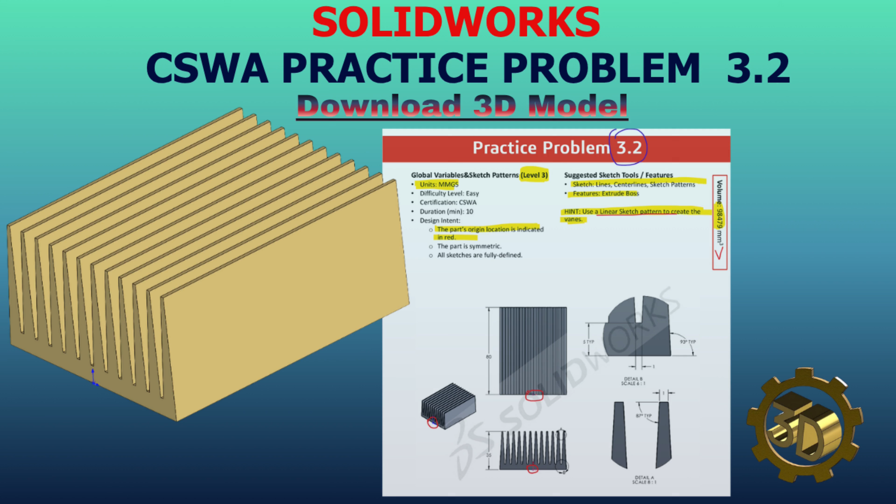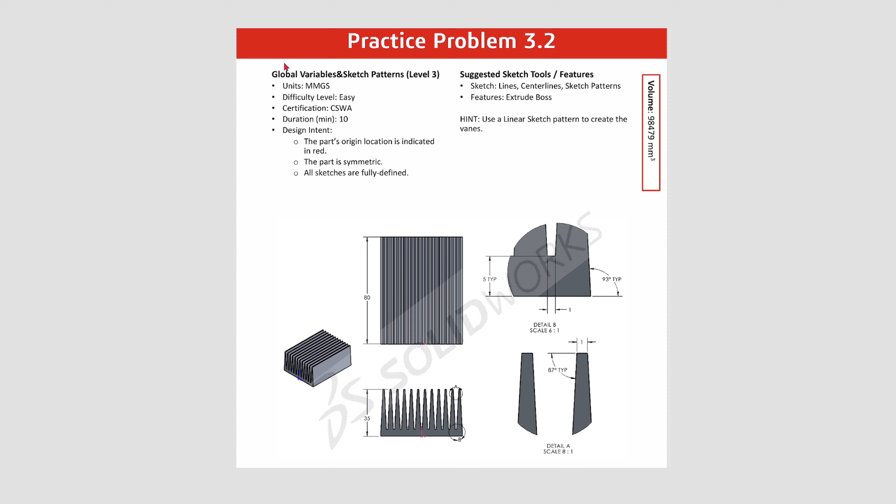Let's jump in by quickly reviewing the key details of this task. We're working in MMGS units, and this exercise focuses on global variables and sketch patterns level 3, which are very useful for controlling repetitive geometry efficiently. For this model, you'll mainly use line and centerline tools, sketch patterns, extruded boss.

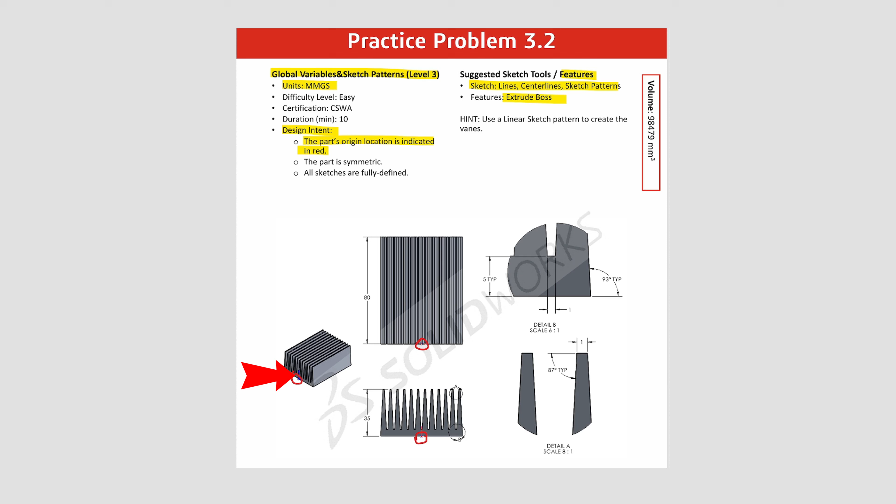The origin is located at the center of the lower front surface, so make sure your initial sketch is positioned correctly. That will save you time later. Here's an important tip. We'll be using a linear sketch pattern to create the vanes, which is much faster and cleaner than drawing each one manually.

Also, once your model is complete, the final volume should be 98,479 cubic millimeters, so you can use that to verify your result. Now let's break down the modeling strategy. The part is symmetric about a vertical centerline, so we only need to sketch one half, specifically the right side, and then mirror it to the left. This approach keeps your model simple and fully defined.

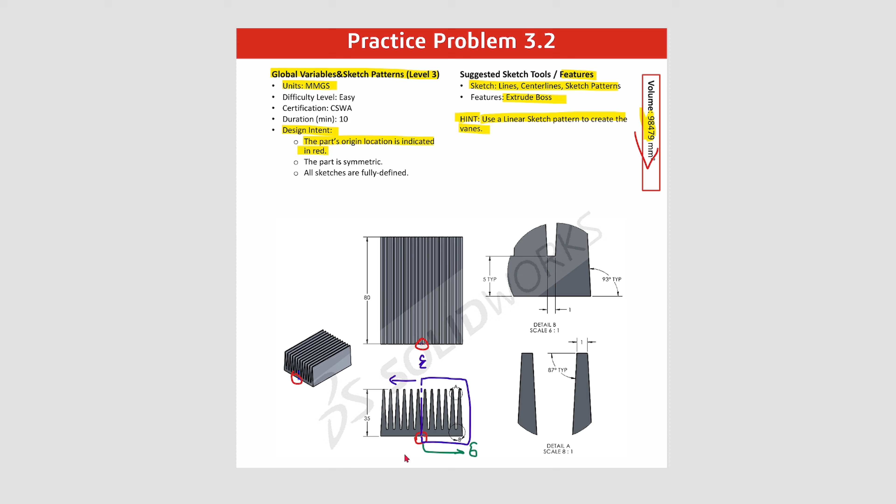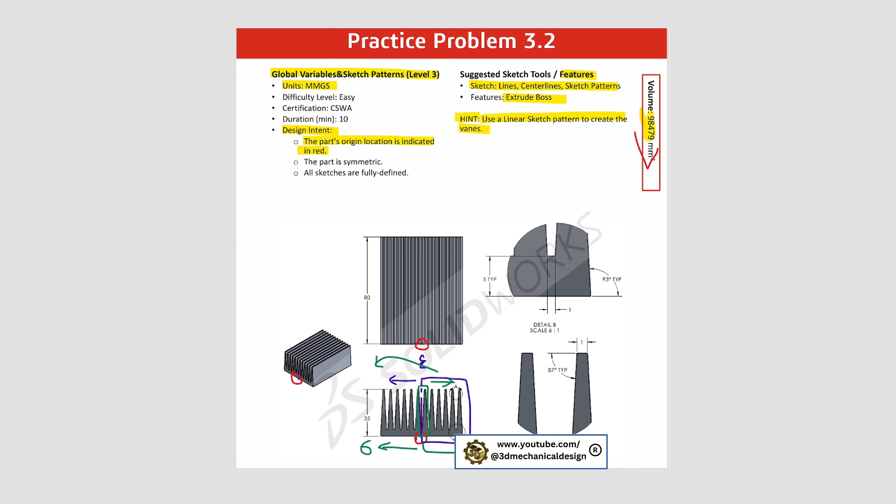Next, notice that there are 6 identical vanes on each side. Instead of drawing all of them, we'll sketch a single vane. Use a linear sketch pattern to create the 6. Then mirror to the left. I think this is the most efficient way to build the geometry. Alright, that's the plan. Let's get started.

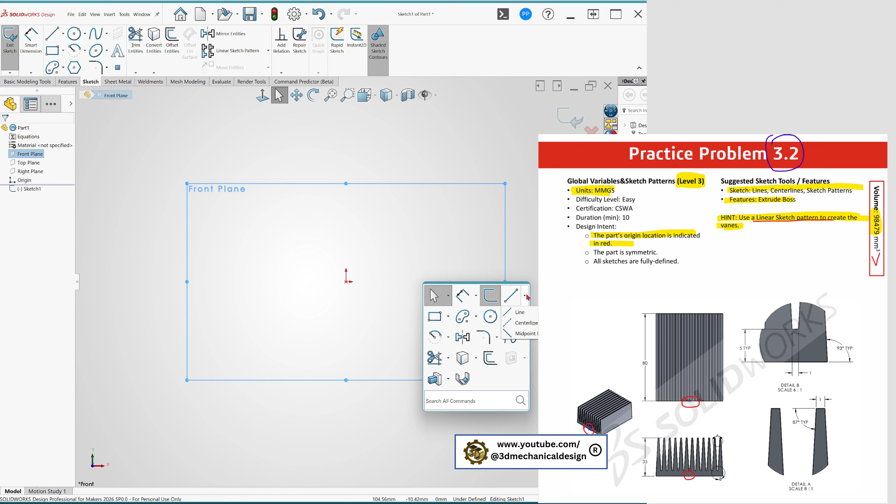Go ahead and open SolidWorks. Alright, let's start by confirming the units are set to MMGS. Next, go to the front plane and begin a new sketch. First, draw a vertical centerline starting from the origin and set its length to 5 millimeters. This will be our main reference.

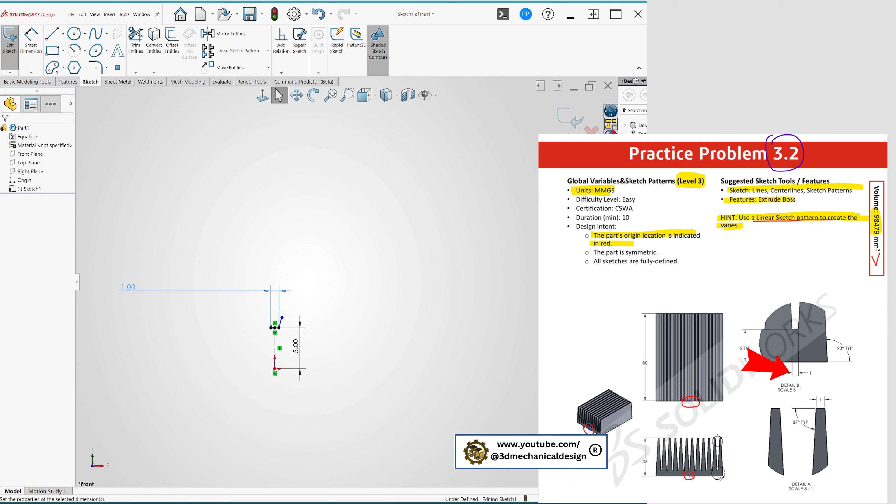Now add a horizontal line, 1 millimeter long, positioned above the origin. Make sure it's centered on the top point of the vertical centerline. From here, we'll sketch the first vane on the right side. As you build the profile, make sure that the bottom points are aligned horizontally. This is important for keeping the geometry consistent.

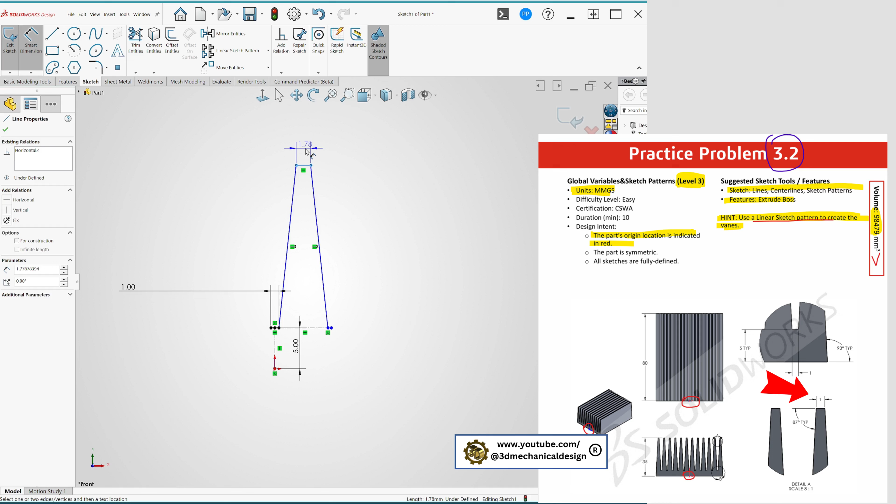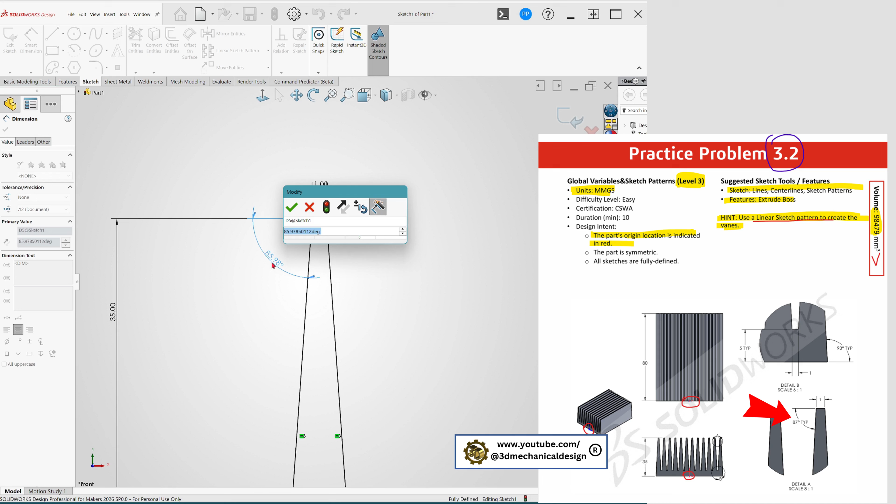Now go ahead and fully define the sketch using the dimensions from the drawing. Once everything turns black, we know it's fully constrained.

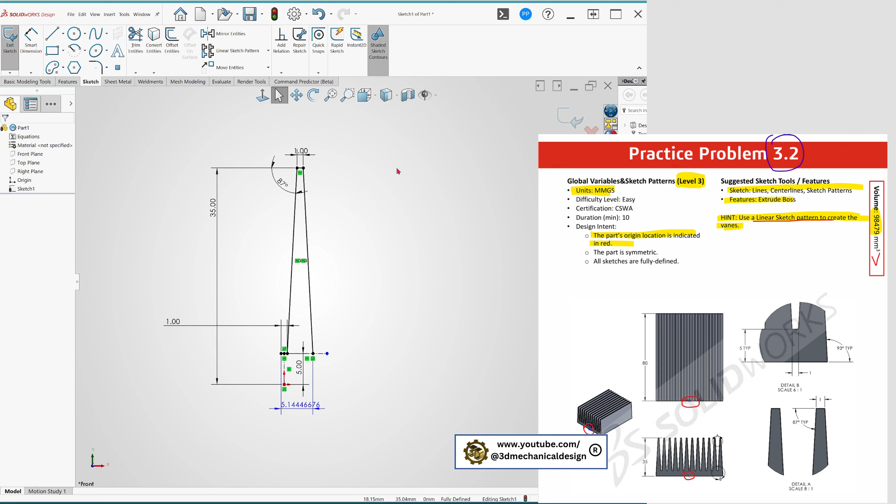Next step, let's calculate the vane pitch. To do that, measure the total distance from the leftmost point to the rightmost point of the vane. Set the measurement precision to something high, up to 8 decimal places, so we get an accurate value. Now we'll use the linear sketch pattern tool. Set the pitch to 5.14446676 millimeters.

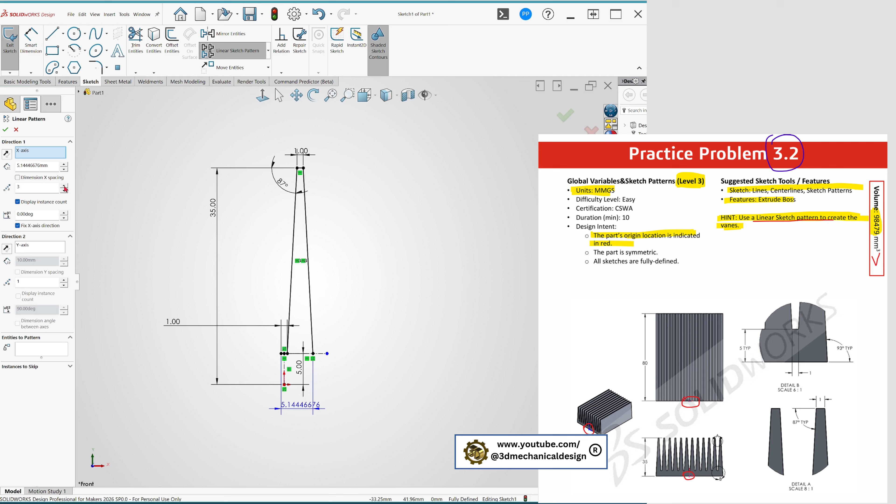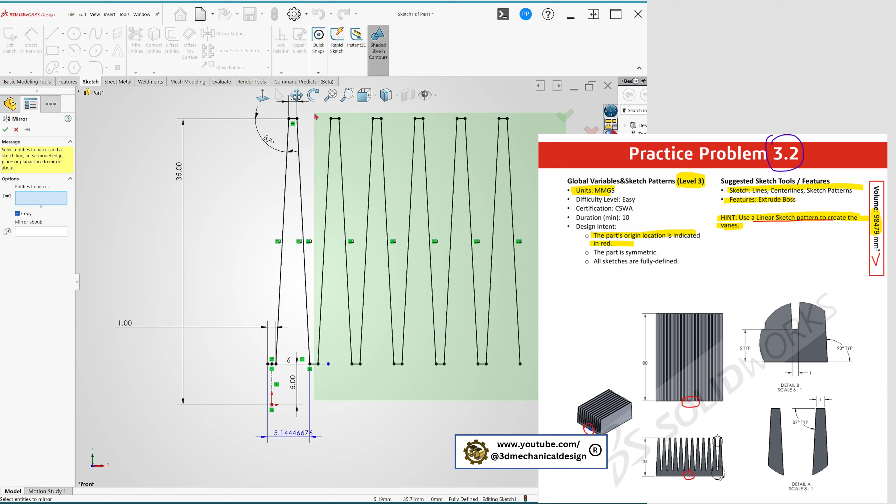Set the quantity to 6. Then select the vane entities to pattern. Once that's done, use the mirror tool and mirror everything about the vertical centerline. Perfect, now all the vanes are created.

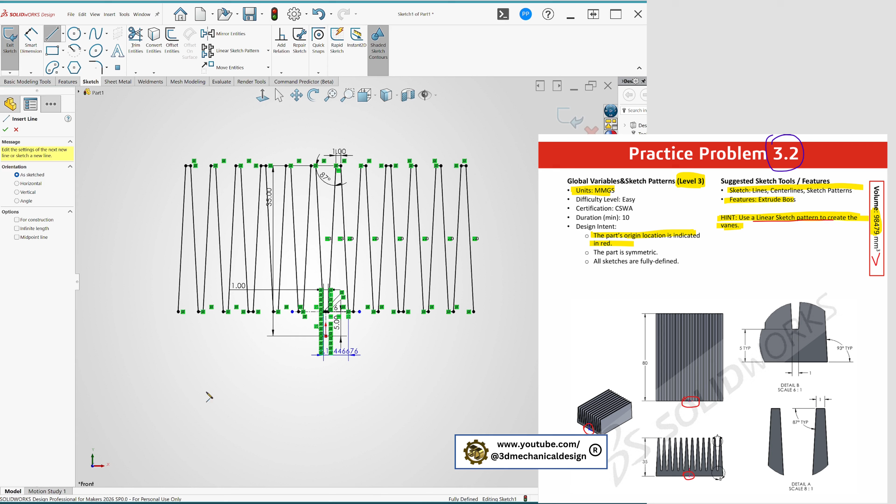Next, let's complete the outer profile. Let's draw a horizontal line through the origin. Add a coincident midpoint relation between the line and origin. And extend it so that its endpoint touches the side edge of the vane geometry. Then add 2 inclined lines on both sides to close the shape.

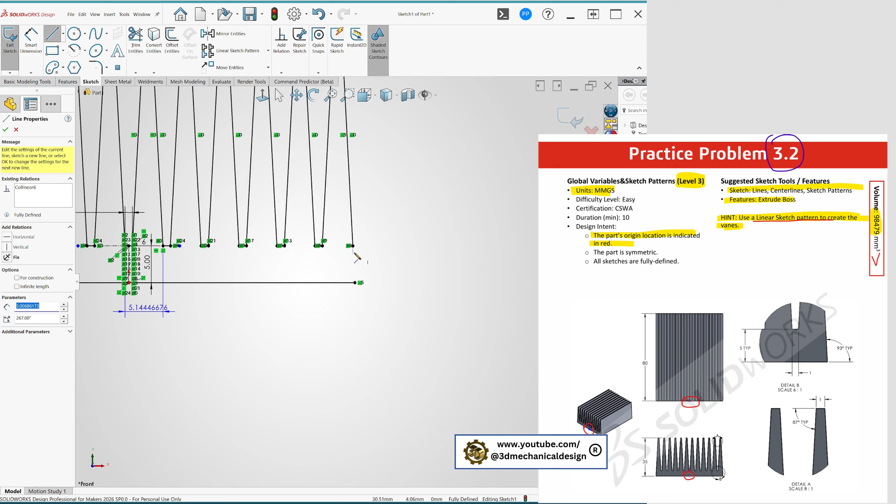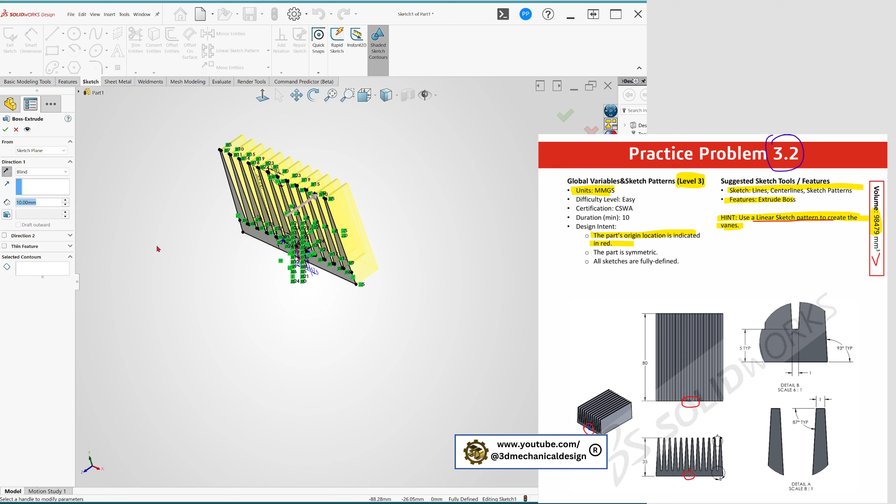Once the sketch is fully defined, use Extruded Boss and set the depth to 80 millimeters. The origin placement should match the drawing so everything lines up correctly.

Finally, let's verify the result. Go to the Evaluate tab, Mass Properties, and check the volume. You should get 98,479 cubic millimeters. If you do, your model is exactly correct.